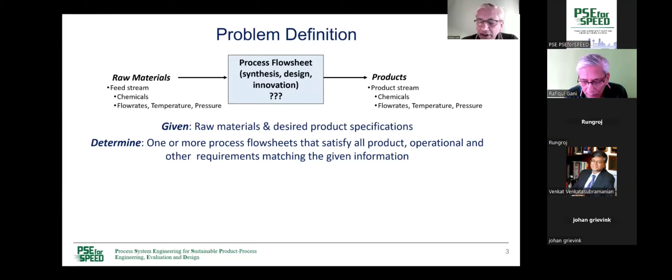As I said, I will start with part 1, where I will introduce the methods for process synthesis design innovation with emphasis on the domain knowledge. The first thing I want to talk about is problem definitions. Here, say that we know the raw materials that we would like to process in order to obtain products with some specifications. Now, in some cases, the chemicals that come in and go out are the same. There will not be any reaction. It will be only a separation process.

Or when the chemicals that come in and go out are not the same, then there would be some reactions or conversions of the raw materials. So this is the basic definition of the problem that we want to solve. We want to know the process flow sheet. We want to know its design. We want to know whether further, better processes could be found. And I will define in more detail what the process synthesis problem is.

The process synthesis problem is that we have some raw materials that we can see on the left, RM1, RM2, and we want to process this to obtain products on the right, which can be P1, P2, P3. And then in the middle, we need some operations that will convert or process the raw materials to the products. And those operations can be different operations that you see on the left: distillation columns, heat exchangers, pumps, reactors, and so on. So the synthesis problem is which are the steps that are needed, and for every step, which operations are needed, as highlighted on the diagram of the network.

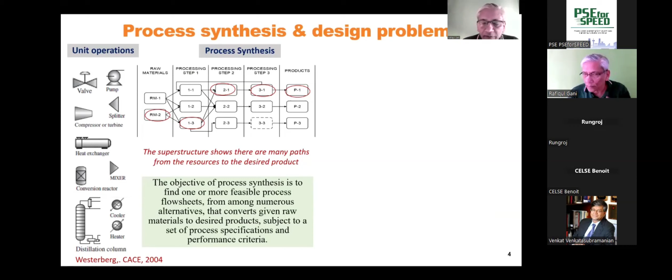Once we have the flow sheet, which is defined by the highlighted boxes, we have a process flow sheet, but we do not have the design of the operations in the process flow sheet. That means in a distillation column, do we have the number of stages, the feed location, etc.? In a reactor, what kind of reactor, the reactor conditions? In the heat exchangers, what kind of heat exchangers, the design of them? All these details need to be filled out.

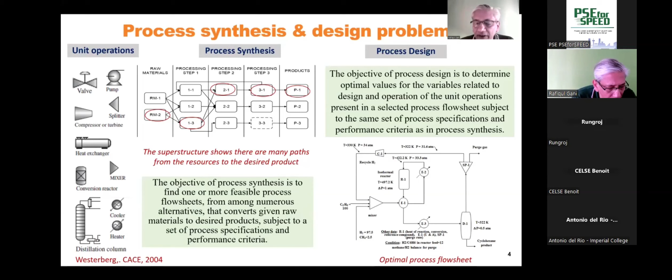Now, the design also needs to be such that we have an optimal process flow sheet with respect to cost, with respect to other constraints like sustainability, safety, and so on. At this point, then we have not only a process flow sheet, but also an optimal process flow sheet satisfying certain constraints. Now, is that enough? I would say it is not enough.

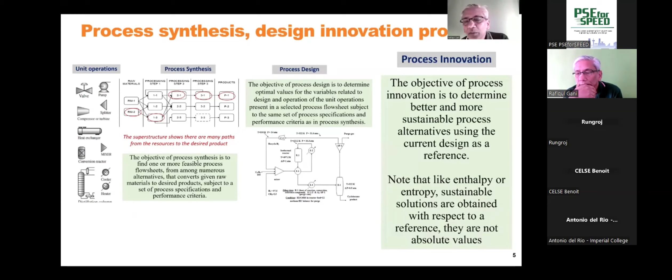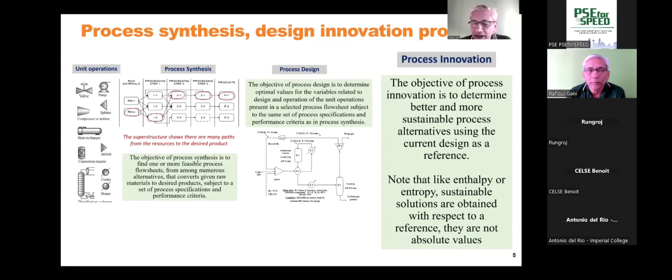We should try to look at more sustainable solutions. And here, by sustainable solutions, we mean that compared to the reference, can we find alternatives that are better in terms of energy, in terms of carbon footprint, in terms of operations, and so on. And if we can find them, then that is the final innovative process flow sheet that we are looking for, and that would be, by definition, more sustainable solutions compared to the reference that we have at the end of the design. So this is the problem we want to solve. Synthesis design innovation, and we will call it sustainable process design.

What are the methods by which we can obtain them? The first one we will talk about is the evolutionary method. This is the method developed by Professor Douglas, and he wrote about it in his book, Conceptual Design of Chemical Processes. It has been used by many people and also in industry. The basic idea of this method is it's a rule-based expert system. Expert asks question, user answers the question.

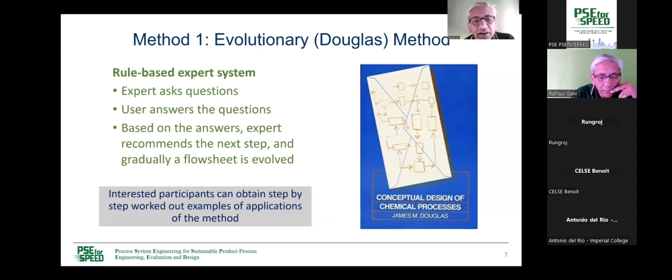Based on the answers, the expert recommends the next step, and gradually a flow sheet is evolved. I'm not going to show too much or discuss too much this method, but any interested participant can contact us, and I can send several detailed worked-out examples.

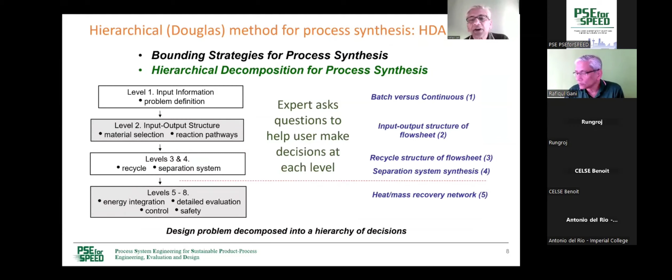Basically, the method is broken down into several levels, and at different levels, different parts of the process synthesis design issues are fixed, like is it a batch or continuous process? Are there recycles? What are the separation systems? And so on.

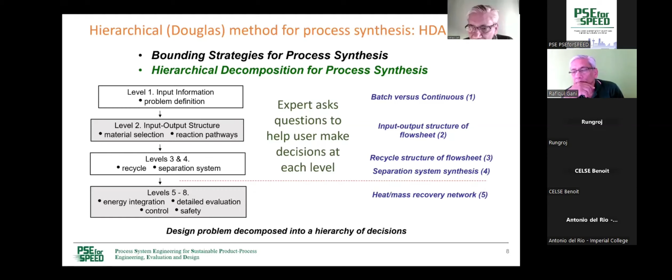In summary, we can say that the method needs a lot of data, a lot of knowledge, and also some computational tools that can be very simple ones, as given in Douglas's book, but we can also use more detailed computational tools that will generate the data that is needed. The method is rule-based and generates a process flow sheet. There is no guarantee on optimality.

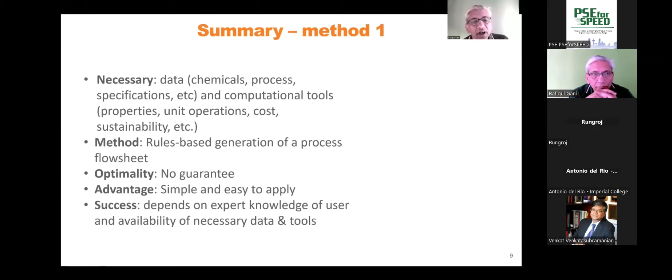The advantage is it's simple and easy to apply, and that's why it has been applied in many places. And the success depends on the expert knowledge of the user and availability of necessary data and tools.

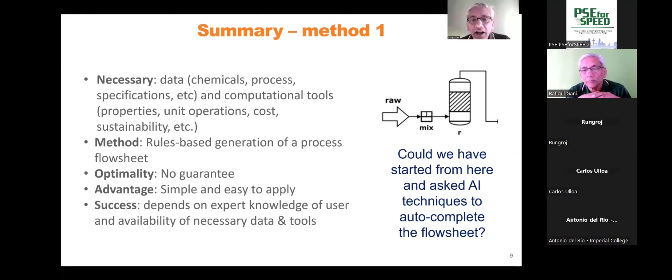At this point, I want to introduce a problem to you. As we can see in the figure on the right, we have some raw material. We do not know what raw material. It comes into the reactor, and a reactor effluent goes out. Can we autocomplete this flow sheet? Just think about it, and I will come back to this later in my lecture. And I go to the next method.

The next method is superstructure-based optimization. So instead of one flow sheet, we want to find all possible flow sheets and also the optimal flow sheet. So here we need a superstructure, and two of the issues in a superstructure are the concept of processing steps or tasks that need to be performed, and the number of intervals or techniques available for each task.

The first issue is what is a processing step and how many processing steps are needed. So if we want to go from the raw materials on the left to the products on the right, how many steps are needed, or how many operations need to be performed to process the raw materials to the products. So that's the first issue.

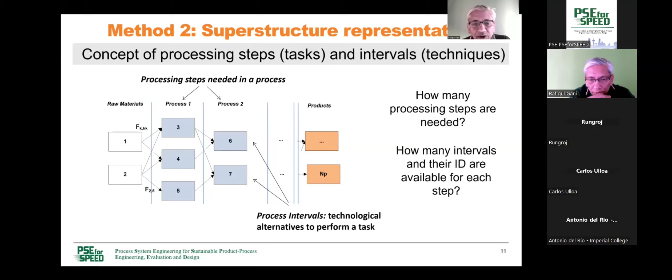The second issue is for each processing step, how many intervals, how many alternatives are there? If we can fill these two questions with all the information, we will end up with a superstructure, as you can see, in a simplified form.

Another important issue is once we have the superstructure, in order to do any calculations, we need models so that we can do not only mass and energy balance, but design calculations, whatever. So what is the model for each of those boxes that you see in red and green and blue? We need models for each of the intervals or techniques. We need to derive them, or we can have them in a library.

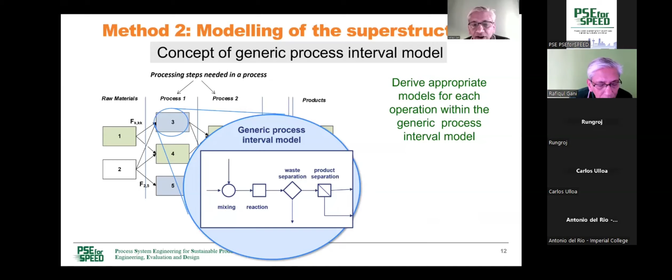We have developed what we call a generic process interval model, where each interval can have operations like mixing, reaction, different kinds of separation. And in the library, we will have in the background different versions of those kinds of models. Now, the interval can have all of these operations, or none of these operations, or a combination of those. So in principle, it could be a network within a network.

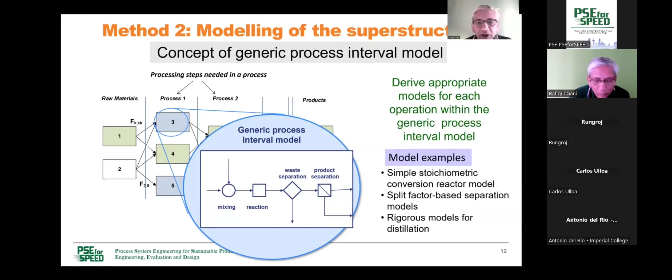But if we have the models of different complexity, we collect all the model equations for each of the intervals, then we will have the full model for the superstructure. Once we have that, we add an objective function that can have different terms: cost, specifications, sustainability criteria, health, safety criteria, and so on.

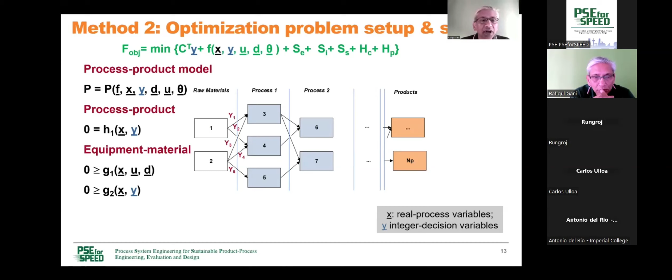And then we have the process model and the specifications on the products. We have constraints on the equipment and material. We have constraints on the combinations between intervals. And this then represents a general problem, which can have different forms depending on the model we use and the problem we want to solve.

So we can have linear programming, nonlinear programming, mixed integer linear programming, MINLP. If we do not have an objective function and only the process model, we can also have just process simulation of different types.

So once we have those model equations to represent the entire superstructure, we need a solver to solve those equations. And the solver will depend on what kind of problem we are solving and the problem complexity. The number of equations can be as little as 6 linear equations or as large as 6 million highly nonlinear equations.

So what we need is also, in addition to the solver, a solution strategy. And all of these can be put into a computer-aided framework where we have a tool which will help to create a superstructure, which will help to retrieve the models from a model library and have the superstructure model, which will then formulate the problem that we want to solve and call the solver. And before calling the solver, we need to provide data, in the form of model parameters as well as input data that can come from a database, and then we use the solution strategy to get the solution.

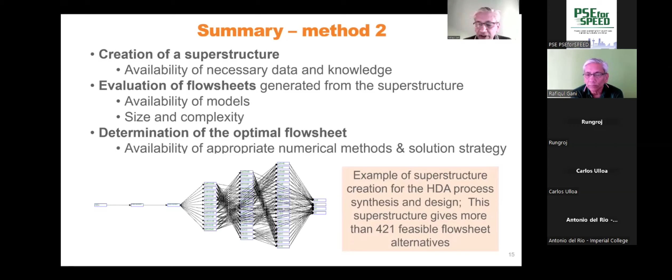What you see in the figure below is the superstructure for the HDA process that we will discuss quite a lot in this presentation. And for this superstructure, there are 421 feasible flowsheet alternatives. Can we evaluate all of them simultaneously? It can be difficult. We prefer to do this in a decomposition manner, that is, break down the problem into smaller subproblems and solve them in a specific order.

This brings me to the final method that we are going to discuss in more detail. This is the domain knowledge-based hybrid AI method for synthesis, design, analysis, innovation, giving us sustainable process design. So let's look at some of the concepts, workflow, and data flow. The method is based on thermodynamics and physical insights, especially for chemical process synthesis or any process synthesis. Then we use extensions of these insights plus some domain knowledge for the process design part. Here we also use reverse engineering, and then additional domain knowledge and more insights help us with process intensification.

I'm going to also revisit representation of the process flowsheet, superstructure flowsheets, sustainable process design with respect to synthesis, design, and analysis issues, and sustainable process design with respect to innovation issues.

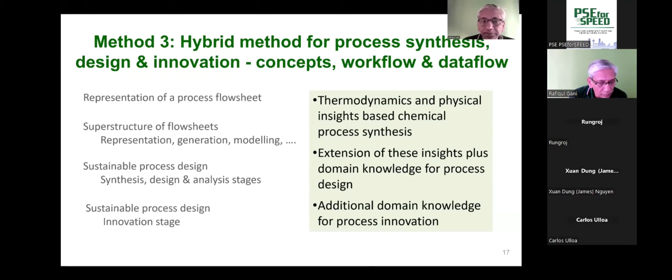So first, some concepts: flowsheet representation with the eSFILES. Here we can see that just like a chemical has a chemical name, for a chemical process, we propose to have a process name. A chemical has a formula with respect to the atoms present. The process will have a formula with respect to the process atoms present. PA here indicates a process atom. The I in front indicates it is an input process atom. R, FL, DL, GM indicate they are operation process atoms. O indicates an output process atom. And the numbers 2 indicate how many there are, just like in a chemical formula.

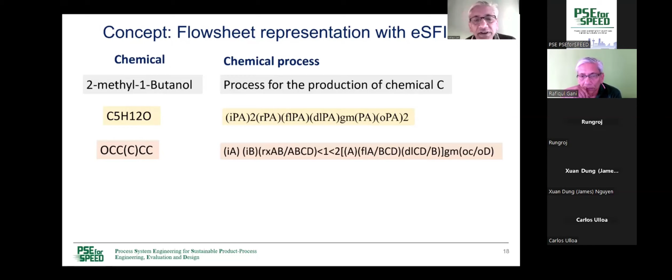And once we know the formula, we can write, in the case of a chemical, the SMILES string. In the case of a chemical process, we can write the eSFILES string. And once we have these, we can also draw the molecular structure in the case of a chemical and draw the chemical process flowsheet structure in the case of a chemical process. Note that this drawing is not just a picture. It has important information in terms of the atoms present in the chemical or the process and the bonds that connect them, and which chemical and which atom are very important here.

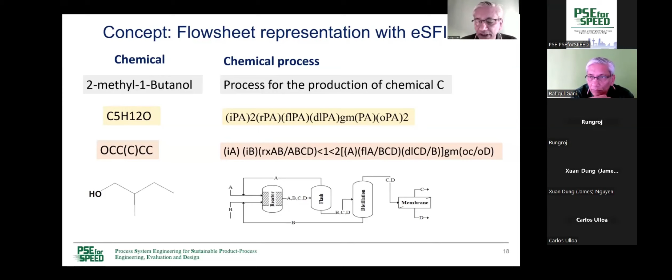So with this background, let me show you how we will use the concept of process atoms. We have a number of process atoms. We have a library of process atoms where you can see different types on the screen. We combine them and get a flowsheet. We have the formula for the process, and we have the eSFILES for the process. I'm not going to discuss more on these now, because in the third lecture, Dr. Vipul Mann will give you all the details of the grammar and the syntax and so on.

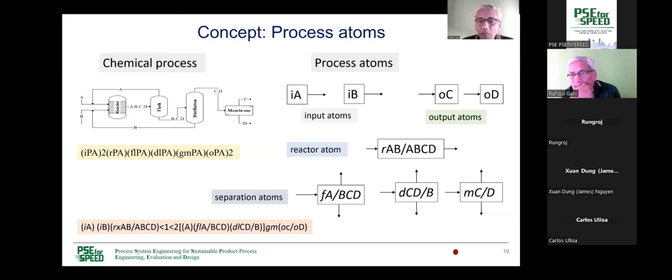But before that, let me also point out that this method is a knowledge-based intelligent system. It does not ask questions like the evolutionary method to make any decisions. It generates the data and guides the user through the workflow steps of different algorithms. It's the user who is in charge. It's not an automated system, but an interactive system.

So the first step, as we talked about before, we need to tell what are the input materials, that is the raw materials coming in, what are the products one would like to have, to process that information about all the input and output in terms of purity of the product, in terms of impurity coming in with the reactants. In this case, we are going to use the HDA process as example to highlight all the different steps.

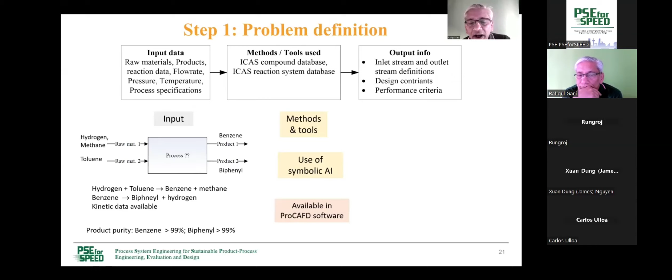In each of these steps, whenever you see the box with available in ProCAFD software, it means our software ProCAFD for sustainable process design has all these steps included in the software. And we use some kind of symbolic AI that Professor Venkatasubramanian will also talk about. So we provide a guideline to the user to define the problem.

And once the user has defined the problem, we will get to know that the process has reaction. The reaction kinetic information is given, and we will know that because the reaction is not 100% converted in terms of raw materials, there will be reactants that need to be recovered and recycled. And the total number of chemicals coming out of the reactor will be also known, and high purity separations will be necessary. These are the information that we will get.

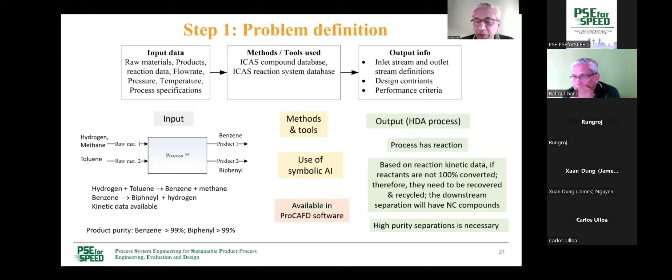Also, the user, in this case, will have to provide the reaction. We are developing a reaction database, but until that time, the user has to give the reaction, and if the atomic balance does not satisfy, the user will have to provide the reaction such that the atomic balance is satisfied. Otherwise, it will not proceed. Once we have step one, we now know all the information.

The next step is knowing this information and generating additional information in terms of retrieving data of the chemicals of the process, retrieving or calculating property calculations of binary mixtures, and many other similar calculations, but not actually process calculations, because we do not know the process at this moment. We know the chemicals, and so we calculate the properties of chemicals, both pure and mixture, and from that, we will try to figure out with our tools what kind of separation or operations can be used to generate the flow sheet.

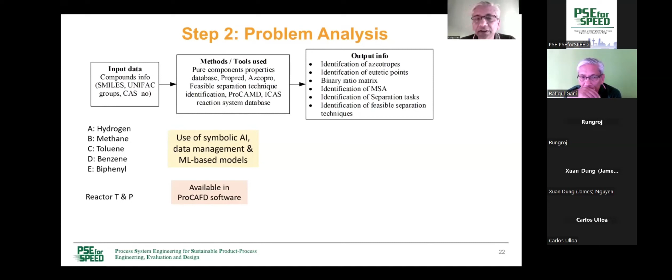And also we know that since hydrogen and methane are coming in together, they will be also going out together. And so even though we have 5 chemicals, we have 4 products. And because we have 4 products, we will have a minimum of 3 separation steps in the process. And because we have 5 chemicals, we have 10 binary pairs of chemicals. Each binary pair could indicate the key compounds in a separation.

And if we know the properties of all these binary pairs, like what are the ratios of boiling point, melting point, vapor pressure at boiling point, and so on, it can indicate to us which type of separation would be feasible. Also, we take into account the driving forces, whether any binary pair forms an azeotrope or eutectic points, and so on. Based on this information, we will be able to find out from our knowledge base a set of feasible separation techniques that could be used after the reaction.

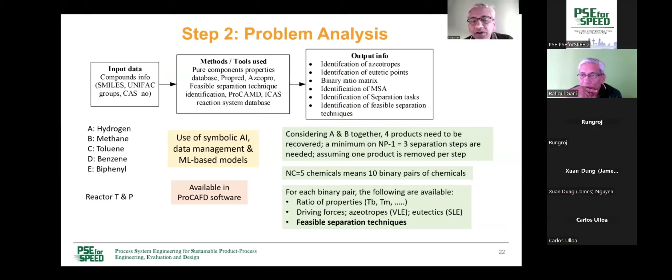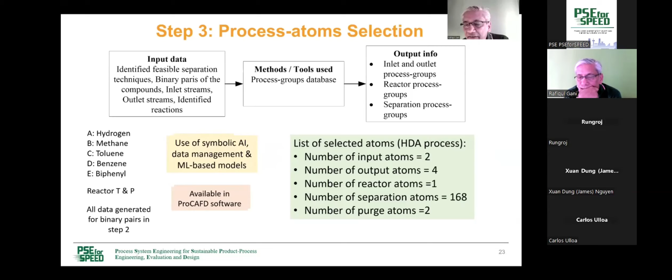So next, we go to step 3. Having all this information that I pointed out in the previous step, we will now have a list of the process atoms. We have 2 input atoms, 4 output atoms, 1 reactor atom. We could have added more reactor atoms if we had more reactor information. We have identified 168 separation atoms and 2 purge atoms because there are 2 recycles.

What are the 168 separation atoms? We have separation techniques for 4-compound separation, 3-compound separation, 2-compound separation, and for each of them, distillation could be one, membrane could be one, absorption could be one, crystallization could be one. So all those separation techniques are taken together and we have 168 separation atoms.

What is the next step? Next step is to generate the flow sheet. Having all this information, the problem is now, how many ways can we assign the process atoms that we have to the 3 downstream separation steps after the reactor atom?

Note that the input atoms are at the start, the output atoms are at the end. So how many ways can we combine? And we have put in rules so that some redundant combinations are not used. So for example, if we have already decided a 4-compound separation, in the downstream part, we do not need to consider those 4-compound separations anymore.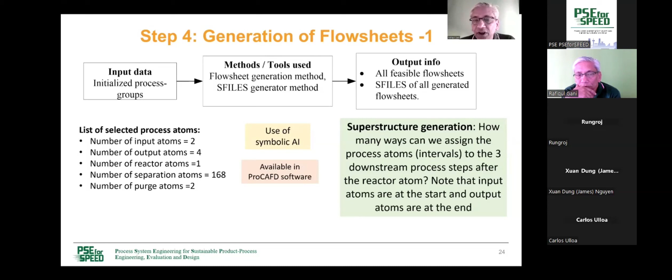So like that, even though there are 168 separation atoms that can, in principle, give us many flow sheet alternatives, it's not a combinatorial explosion. And here are 2 examples.

If we do not restrict the separation techniques that we can generate, now we will have a superstructure with 421 flow sheet alternatives. These are feasible theoretically, but we cannot calculate for all of them because for some of them, we know that we do not have the model parameters. For example, we may have several membrane-based separation atoms, but for some of them, the permeability data that would be needed are not there, or the adsorption isotherms are not available.

So if we remove them, and if we also see that the HDA example process is a hydrocarbon separation where there are no azeotropes and no close boiling mixtures, basically a combination of flash and distillation are feasible there. So if we take only the flash and distillation, you see the superstructure below, which has 10 feasible alternatives, even though many more can be generated.

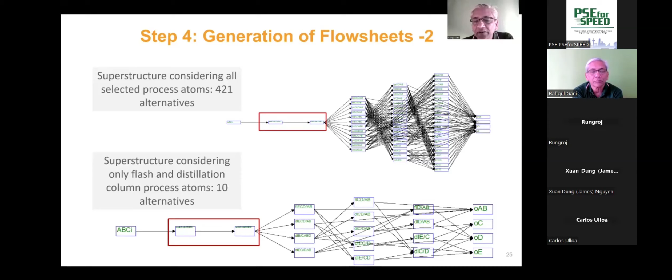So now let me give you a little bit more concept with respect to extension of the eSFILES for superstructure. So let us say that we have a mixture ABCD that may be extracted from some seed or from the ground, or is a reactor effluent. We need to separate these 4 compounds into 4 pure compounds. And let us say for illustrative purposes that for these 4 compounds, no binary pair forms azeotropes, and they can be separated very efficiently by distillation.

So we have a 4-compound separation, and we need minimum 3 steps. In the first step, we will make a 4-compound separation, and by distillation, only these 3 will be feasible. And the integer variables we have introduced now are binary integer variables. If it is 1, that is the path that will be taken. If it is 0, then it's not the path that will be taken. And the summation of these 3 binary variables will be 1.

So in that case, going from the 4-compound to the 3-compound separation, or after the first separation step, we will only use one of these 3 alternatives. Note that the second alternative breaks the 4 compounds into 2 binary pairs. And the other ones reduce the 4-compound separation into 1 product and a 3-compound separation.

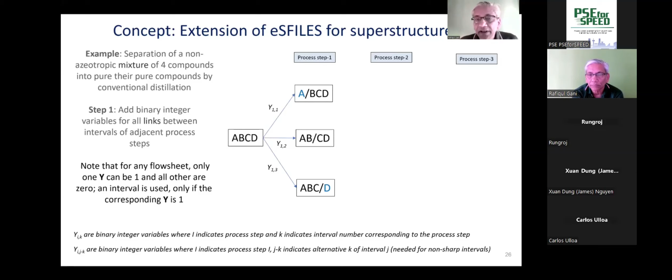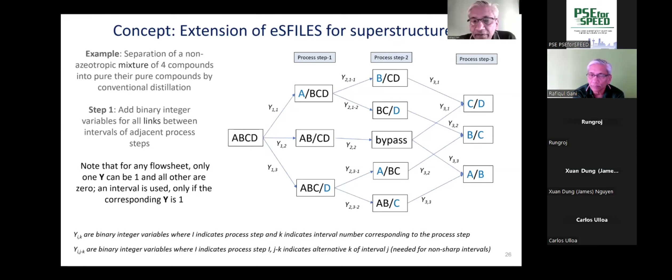So in the next step, we have 3-compound separations. The middle one is bypassed because the separations involve 2 compounds. So we have these alternatives, and then the last one has 2-compound separations. That is the superstructure, and in each case, the binary variable summation is 1, so we will only use one of them. So that's the first part of representing the superstructure in order to derive the eSFILES for the superstructure.

Next step, we collect all this information and we put them into a SMILES string, just like the eSFILES string. So we have the input A, B, C, D. That's the input atom. Then Y1 indicates, if it is 1, that the process atom will be used. And the subscript K indicates one of the 3 that is available in step 1. Then in step 2, we have a J because there are 2 alternatives for some of the intervals. And then the K is which interval.

So by adding the values of J and K for each of those intervals, we can generate from this eSFILES of the superstructure all the different flow sheets that are needed. But before I go there, let me also show the hypergraph for the superstructure. And again, with the integer variables and the values of J and K, we can generate any flow sheet from this superstructure.

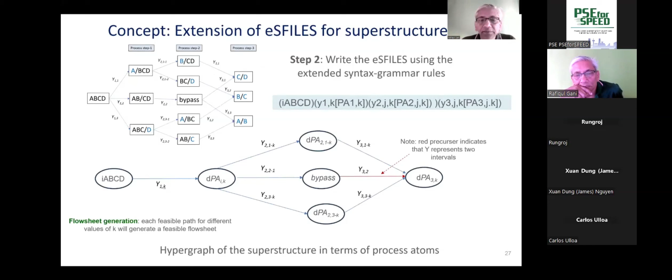So now let's see: we have the hypergraph, we have the eSFILES for the superstructure by giving values of J and K for every processing step, and then having a table with all the groups corresponding to J and K, we can then generate the eSFILES for any process flowsheet alternative.

And this would be level 0, where it will be the flow diagram indicating how many chemicals are there, what kind of operations, and then more information about which chemicals, which operations, additional information in terms of which type of operations, what is the model for that, in the simple case like simple mass and energy balance, or more rigorous models.

In each case, especially in levels 1, 2, and 3, there's input information, there is output information, and as we go higher in level, the amount of information increases. But it's both input and output information that is kept. And you will get more information about this also in the 3rd lecture by Dr. Vipul Mann.

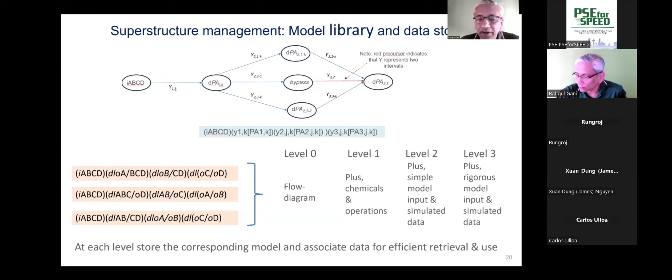So if we go back to the HDA case, we have the superstructure, the simple superstructure, the 2 recycle candidates are highlighted. You can see the eSFILES of the superstructure, and 10 flowsheet alternatives are generated.

Now the next question is, we have generated the flowsheet. How are we going to do the design? Should we design all of them and optimize all of them, or should we remove some redundant ones? For that, we need to evaluate these flowsheets. But we do not have the design, so we cannot do detailed simulation at this point.

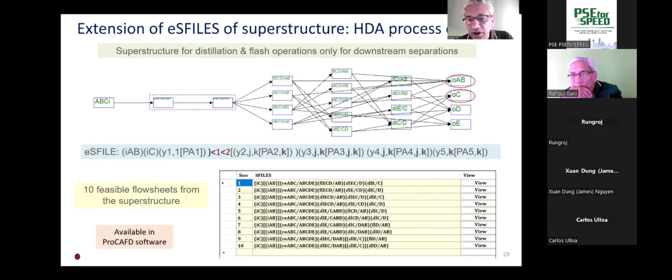So what we have therefore developed is just like a chemical, we can use the structural information to calculate the property of a chemical. Here, we are going to use the structural information to calculate the properties of a flowsheet. And these properties of flowsheet could be energy consumption, carbon footprint, product recovery, product purity, environmental impact, and so on.

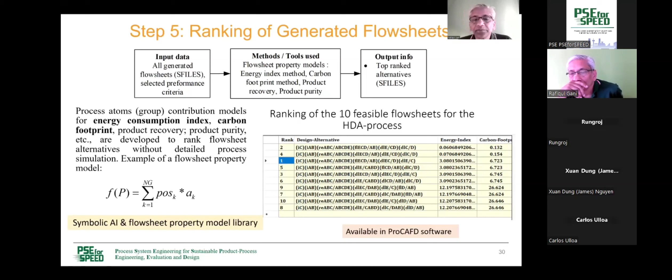For the HDA example, if we take the energy index, we see that there are 2 which are very good with respect to energy index. The lower, the better. And the last 4 are not very good. So we can focus on the first 2 or the first 6 if we want, and ignore the last 4. So for these, let's say, the small number which are promising, we will do the detailed design.

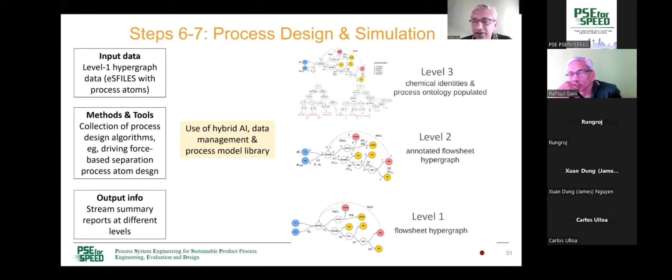And then for each of those flowsheets, as I mentioned before, we have the level 1 information. We will add the level 2 information with the simple models. We will add the level 3 information with the more detailed models, and more information about this will be given by Dr. Vipul Mann in lecture 3. So I will skip more information. But note that from level 1, level 2, level 3, we can connect to different calculators, simulators, to do the simulations and pass the values to us.

HDA process was a simple process in terms of separations, because there were no azeotropes, there was no gas absorption required, and so the flowsheet was simpler and did not require some complex decisions. But in many chemical processes, we do have azeotropes, gas separation. So we have introduced the concept of process groups, which is a combination of atoms, and there is an internal recycle within them. So like a solvent-based extraction that you can see, pressure swing distillation. All of them have a recycle, but which is within the process group.

As far as the process atoms are concerned, we have 2 process atoms. It can be 2 or more process atoms that define a group, but we are defining these groups in such a way that the recycle is within it. And it has the same concept like a ring compound, an aromatic ring or a naphthenic ring compound would be similar to this kind of process groups.

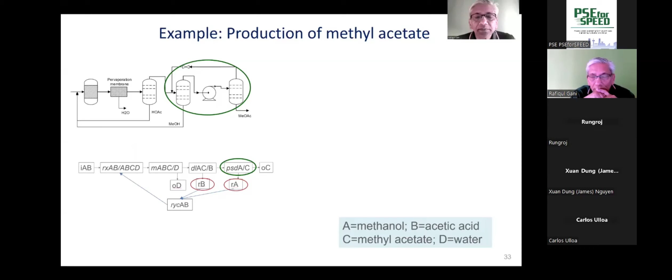And how can we use these process groups? If we take the methyl acetate process, where there is a reactor followed by membrane separation, distillation and a pressure swing distillation, we represent the 2 columns in the pressure swing distillation by a process group. And here is the superstructure, SFILES for it, and different alternatives we can generate. If you look at the green part, pressure swing distillation is possible, solvent-based extraction is possible, and for different solvents, there will be different process groups.

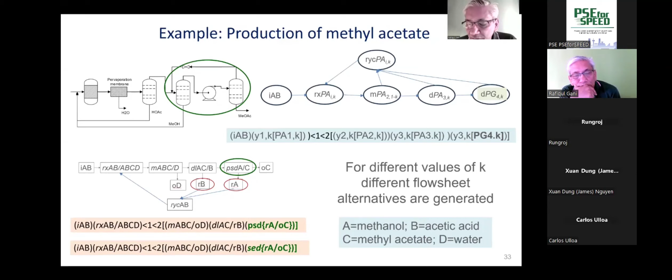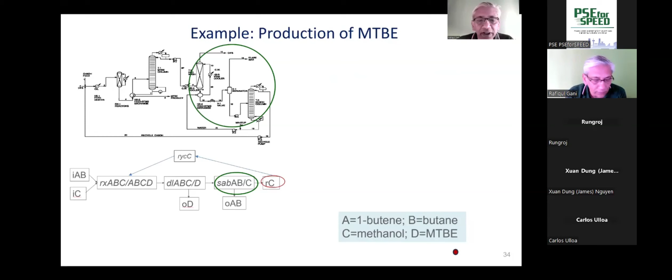So we can generate a large number of alternatives, but note that the process group recycle is not affecting the other parts of the process flowsheet. So it's actually simpler to use and more efficient to do calculations. Another example, the MTBE, where there is absorption followed by solvent recovery. And in the same way, we can generate all the information we need. And again, it's a much better way of representing more complex flowsheets.

In the presentation by Dr. Vipul Mann, he will also show an example where we have 2 reactors in the process followed by separations.

So there will be a process group representing one part of the process, and another part is just the process atoms. So things like that also can be done.

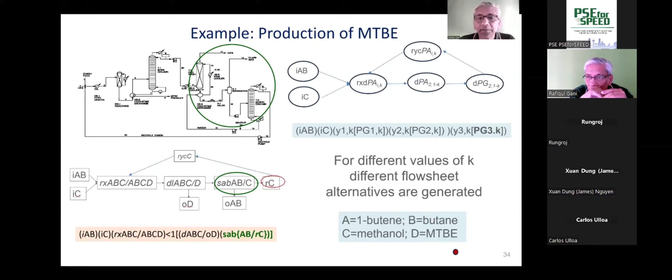So at the end of step 7, we have a flow sheet, one or more very promising flow sheets, and we can evaluate them. So here now we will do the analysis of cost, sustainability, LCA, safety, and many more. And by doing that, we will identify opportunities for improvement. This can be, for example, integration of hot and cold streams with respect to heat exchange. We could have done that already before. We can also do it here.

We can also find out information like one of the distillation columns is using a lot of the energy, there is some unacceptable release of compounds in a purge stream, like benzene going out in the purge stream, high pressure flow of gases, and so on. Then once we have identified them, we can set the targets for improvement, and then by optimization, by adding more information, we can find alternatives that are better than the reference. And then by definition, any that matches those are more sustainable than the reference.

So at the end of step 9, we will have the targets and the analysis and the reference process. And in 10 to 12, we will do the innovation. And as I said, based on the targets, we will try to find a flow sheet that is better. In the case of the HDA, we do the heat integration and optimization, and we find a more sustainable design.

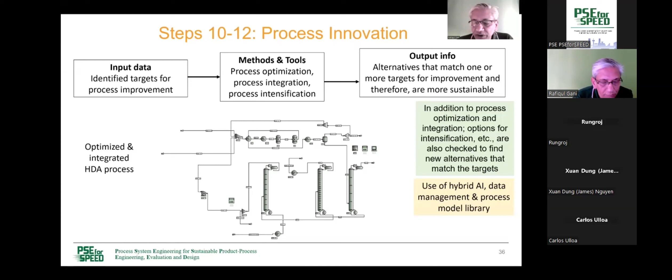In addition to optimization and integration, we could have also done intensification or other hybrid schemes. And would they be feasible or not? Should we use a trial and error way to check whether we can use reactive distillation or dividing wall column or hybrid distillation membrane to improve this process? In order to do this, we have developed a rule-based method where we ask 7 questions in each case.

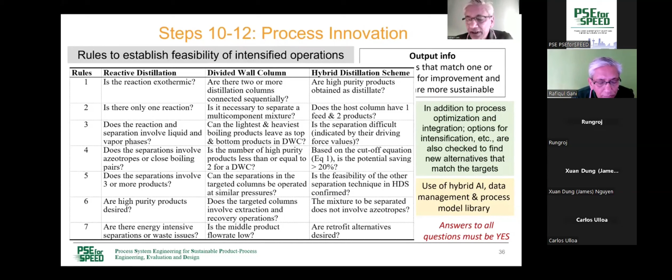If the answers to each of them is yes, then there would be a part of reaction followed by separation that could be replaced by reactive distillation, or 2 adjacent distillation columns replaced by a dividing wall column, or a membrane could be added to the distillation like a retrofit to improve the energy. So all of this can be done, but we do not do trial and error. If the answers to all the 7 questions is yes, then definitely they will be feasible.

So here are some examples. We have the methyl acetate process that can be converted to a reactive distillation, the dioxolane process that can be converted to reactive distillation as well as dividing wall column, and a separation process of hydrocarbons coming from a petrochemical complex that can be converted to dividing wall column and hybrid separation.

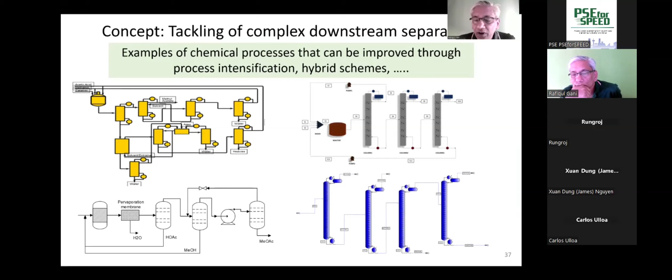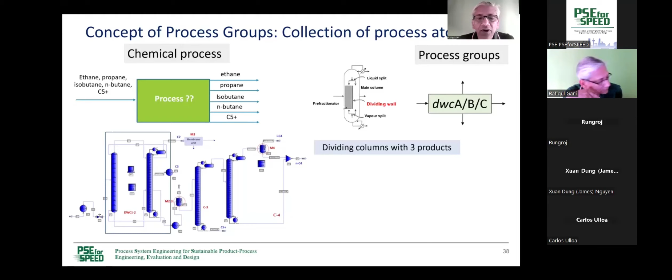So here is the example of the hydrocarbon separation. This is coming from an actual industrial problem. The first 2 columns are converted into a dividing wall column. In the last column a membrane is added, and this alternative gives nearly 40% improvement on the original. And we have now the corresponding process groups also, and a corresponding model for them.

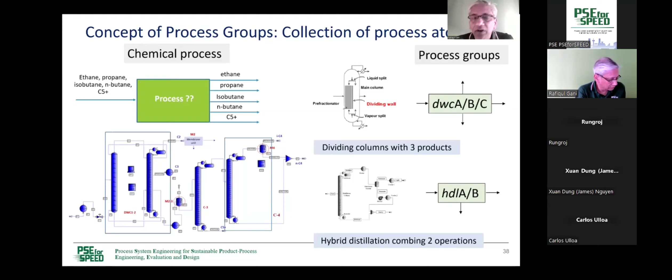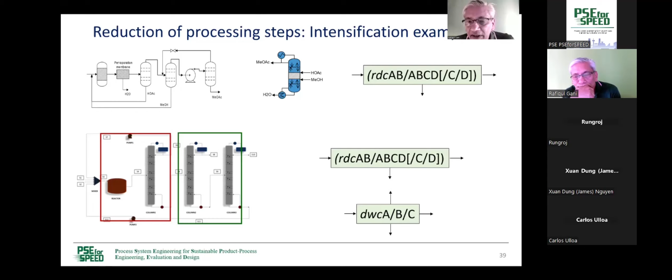Similarly, for the methyl acetate example, the flow sheet is converted to a reactive distillation with an improvement of at least 20%. In the dioxolane process, we have the reactor plus the distillation column replaced by a reactive distillation column, the distillation columns replaced by a dividing wall column, and they're combined together to form a reactive dividing wall column.

And I come back to the question of, we have some raw material coming into the reactor. The effluent is coming out of the reactor going into an absorber. Can we autocomplete this flow sheet? Does it make any sense to do it? And what I would say is that it doesn't make any sense to do auto-completion without a context. We need to know what is the reaction.

We need to know how many compounds are coming out, so we can find out which of the generated flow sheets would be feasible or not. So auto-completion without context would be just generating all kinds of flow sheets. Some of them would be feasible, others will not be. By putting a constraint or a context, we screen the generated flow sheets to find out which are feasible.

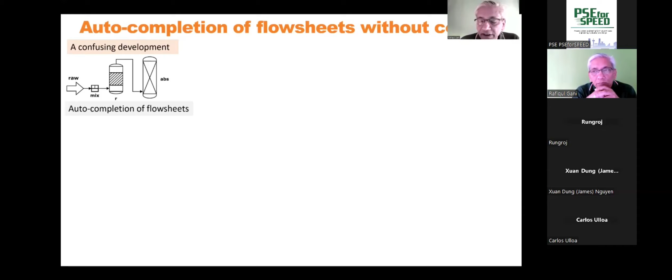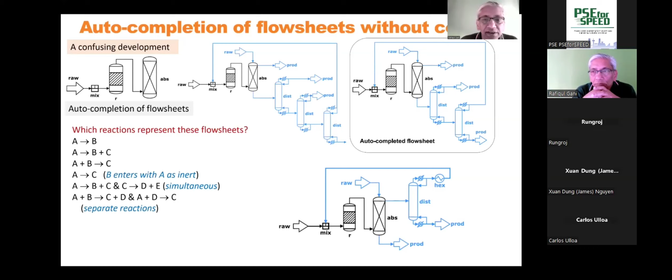This will be discussed in more detail by Professor Venkatasubramanian in his second lecture, but we'll just show the same flow sheets and raise the same questions. Are each of them correct? It could be all of them are wrong. It could be one of them is correct because of the reactions that will take place.

Summary of this method is we have an intelligent, flexible, consistent process synthesis design innovation method. We use hybrid AI with machine learning and domain knowledge wherever necessary, allow systematic solution of related problems by efficient management of the complexity. We use computers to speed up. We use domain knowledge to define the problem at every step.

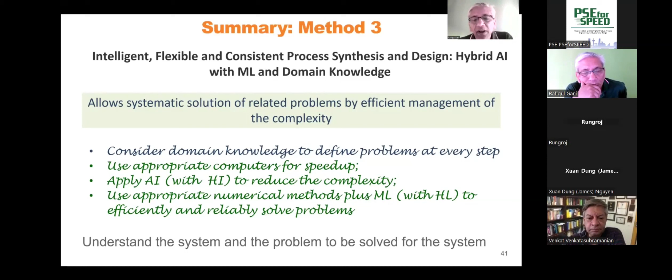We use AI together with HI, which is, for me, human intelligence, because we have to select the AI, we have to apply the AI, we have to train the AI, so human intelligence should not be forgotten. To reduce the complexity, we use appropriate numerical methods plus ML with HL, that is human learning. We are the ones who need to apply the machine learning. We are the ones who need to train the machine learning. So we also need some human learning there to efficiently and reliably solve the problem. It is important to understand the system and the problem to be solved for the system.

Finally, some perspectives. Even though much progress has been made, there are still many issues that need to be addressed to establish the scope and significance of the method that I have shown you. And additional development means widening the scope and significance. So we can solve many problems, but we want to widen the scope and significance. Some extensions, like how to include the vast and available domain knowledge into the algorithms, methods with associated tools, how to transfer the relevant data from one application or problem to another, how to improve and add new models of different layers. So a modeling tool is very important, and we are developing those modeling tools.

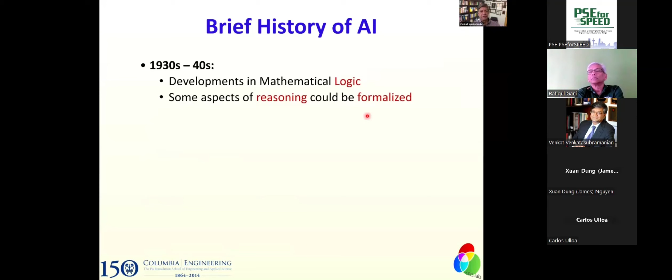So brief history of AI. The origins go back to the 30s and 40s when mathematicians, particularly logicians, started playing around with the idea that some aspects of reasoning could be formalized, which means they can be automated. And then they built upon this idea in the 40s and 50s, and Turing came along and proposed his Turing machine in the 50s, and also the famous Turing test. And so all these things are ideas about the link between the formalization of reasoning and computation, and that abstract concept of computation as symbol processing, which can be automated, hence computers.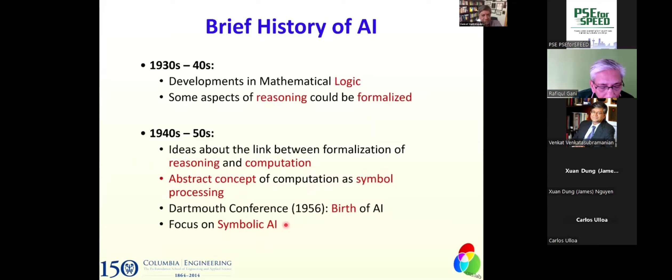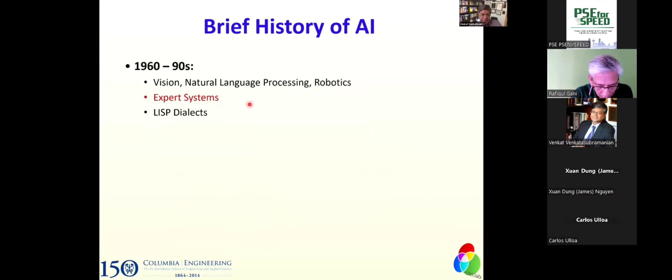AI was born at this conference in mathematics at Dartmouth in 1956, and the name artificial intelligence was given at the time. And the initial focus was on symbolic AI because it all came out of symbolic logic. And in the 60s through 90s, AI people tried to get computers to do vision, natural language processing, robotics. Expert systems arrived at the time, various AI languages called Lisp and its dialects arrived.

And from 1990 onwards, the field shifted towards machine learning, particularly neural networks-based learning, with the rediscovery of the backpropagation algorithm in 1986 by Geoffrey Hinton and company. And so the focus shifted to data-driven AI, and ideas like autoencoder, deep neural nets were proposed in the 90s, reinforcement learning, etc. And then the most recent exciting innovation is transformers, which is behind all the large language models.

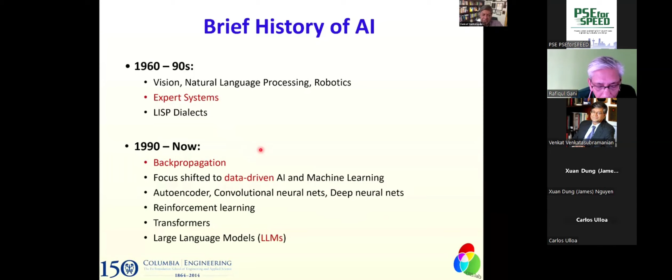Okay, so in phase one, which is what I call the expert systems era, here the idea was to develop computer systems that mimicked human expert reasoning. And the key ideas were structuring these systems in this form: a knowledge base, inference engine and the user interface. And the knowledge base contained domain-specific knowledge, which was represented in the form of if-then rules and semantic networks. And this separation of domain knowledge from inference was a key idea, which gave rise to flexible execution order of the program. So this all happened in the late 70s and early 80s in computer science.

And then immediately these were adopted by chemical engineers in the early 80s. The earliest expert system was developed at Carnegie Mellon by Art Westerberg and his graduate student, Rene Banares-Alcantara, a good friend of mine who is now a professor of chemical engineering at Oxford. So Rene did this work for his master's thesis and for his PhD. And others also started looking into AI-based approaches.

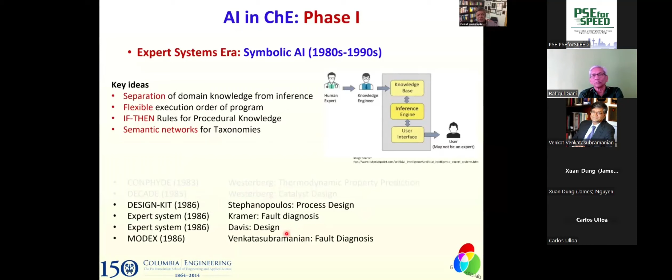George Stephanopoulos at MIT started his AI work around that time with this focus on design, process design. And Mark Kramer again at MIT on fault diagnosis, Jim Davis at Ohio State at that time on design, and myself at Columbia on fault diagnosis. So that was phase one.

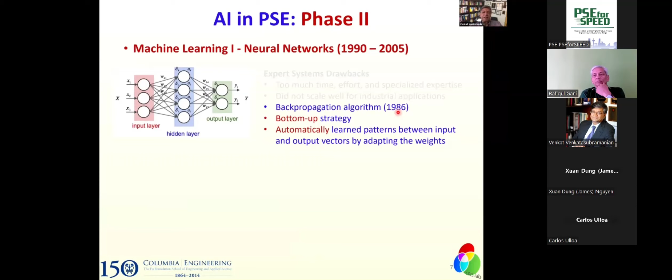Then in phase two, as I mentioned, neural networks was the focus. And that's because expert system development had certain drawbacks. They required too much time, effort, and specialized expertise. And so as a result, they did not scale well for industrial applications. And so people were looking at other paradigms, and neural networks arrived, particularly with the rediscovery of the backpropagation algorithm, where you simply had to show the data to the neural network and it automatically learned the association between these patterns by adjusting the weights. So that's where the backprop comes in. And it's a bottom-up strategy, where the system automatically learned the patterns, which made system development a lot easier.

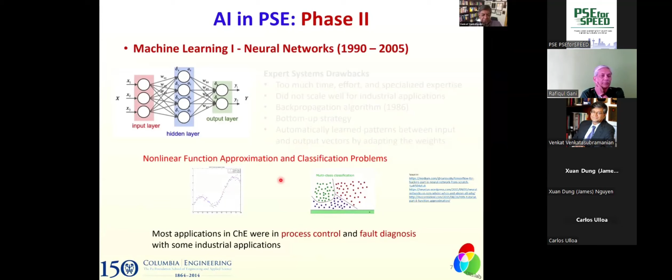So immediately people started applying these things for nonlinear function approximation problems as well as classification problems. And in chemical engineering, lots of applications in process control, fault diagnosis, and property prediction, and so on. And then we entered phase three, which I call the data science era. And that started roughly 15 to 20 years ago, but really picked up speed in the last 10 years.

And the key ideas here are the convolutional or the deep neural networks, as shown here on the right-hand side for a vision problem, reinforcement learning, and statistical machine learning. And what these techniques enabled was to be able to do hierarchical feature extraction, as you can see here, which is what is needed for complex visual perception.

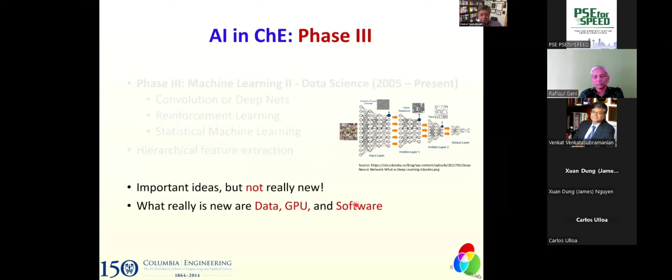These ideas were important, but not all that new. As I mentioned, many of these algorithms and ideas were proposed in the 90s. We simply couldn't use them that much because we didn't have the computing power or the data. So what is really new now are data, GPU, and software, more or less in that order of importance. And this is why now we have Watson, Siri, Alexa, AlphaGo, LLMs, and so on.

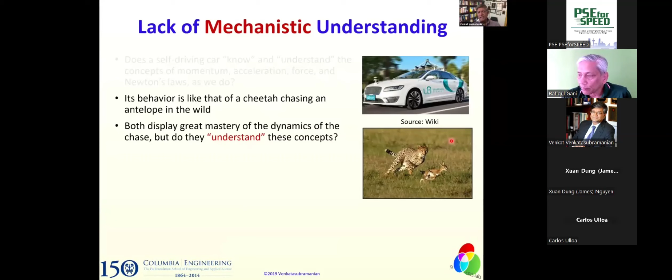But both are clueless about the underlying physics, which is classical mechanics, or the underlying math, which is calculus. So these animals have mastered their task in an operational way. They have an operational understanding. They know what to do, how to jump, how to run, how to chase, how to bob and weave, but they don't understand the deep principles.

My claim is that current AI systems have achieved perhaps an animal-like mastery of their task without gaining a deep understanding as we do. Now, as a scientist, this is deeply troubling to me. And that's why in my lab, we've been working for the last 40 years in developing hybrid AI systems which are grounded in first principles, where we try to put in as much of the underlying physics, chemistry, and biology as possible, and not be purely a black box oriented data science kind of a model.

So we develop first principles based models because I think that is the way to go in the long run, even though in the short run, machine learning data science has its uses. So it's also concerning to me as an engineer because mechanistic causal understanding is important in certain applications like diagnosis, control, and safety. For example, when Yelp makes a recommendation and you go to a restaurant with your date and you don't like the food, then you lost perhaps a couple of hours and a couple of $100, and maybe your date is mad at you, but hopefully nobody died.

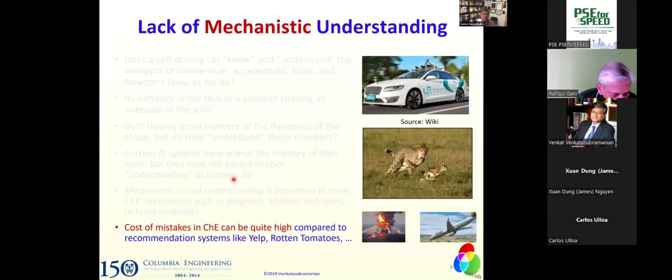Whereas in our domain, when things go wrong, the cost of a mistake can be potentially very high. When our chemical plants explode, people die. When planes crash, people die. So the cost of a mistake in movie recommendations and restaurant recommendations is low, whereas in certain domains such as chemical engineering, nuclear engineering, pharmaceutical engineering, aerospace engineering, mining engineering, and so on, the cost of a mistake could be potentially high. So we cannot simply trust black box models. We have to build first principles based hybrid AI models.

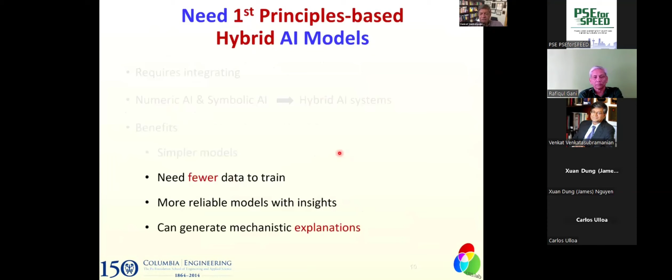So this brings us to the topic of hybrid AI, which is combining numeric AI, which is machine learning, with symbolic AI of the 60s, 70s, and 80s. And the benefits are the models are simpler because they are grounded in first principles. You need much less data to train them, and they are more reliable, and they offer you insights and explanations. So I'm going to give you 3 different applications as examples of how hybrid AI models can be developed and what they look like.

The first one is the flow sheet synthesis, which is what our presentation today is about. Professor Gani talked about it, and Dr. Vipul Mann is going to talk about it much more in the next presentation. So I won't spend much time on this. But I'll give you a quick flavor of how hybrid AI would look in the context of flow sheet synthesis. But I'll spend more time on 2 other applications, which is mechanistic model discovery from data and reaction prediction, and how hybrid AI systems look in these applications.

So now hybrid AI is going to look different in different applications. That is the idea. That's the message I'm going to leave you with and give you a sense of how these things can look different in different applications.

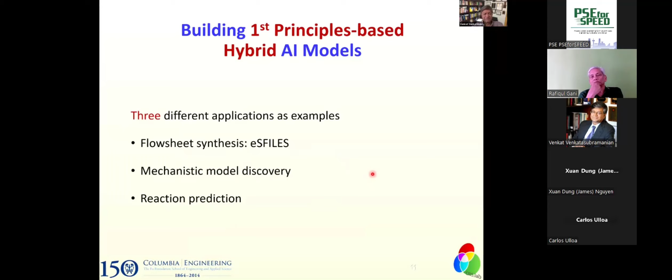Now, in natural language, of course, this idea has been enormously successful. This is how ChatGPT, for example, converses with you. Based on what you have said, it guesses the next word. For example, if I were to say, I'm going to be home for, it's a reasonable guess to say dinner or party or this weekend or summer and so on. So these are reasonable guesses. And even if you guessed wrong, you can still carry on the conversation by correcting yourself in the subsequent sentences.

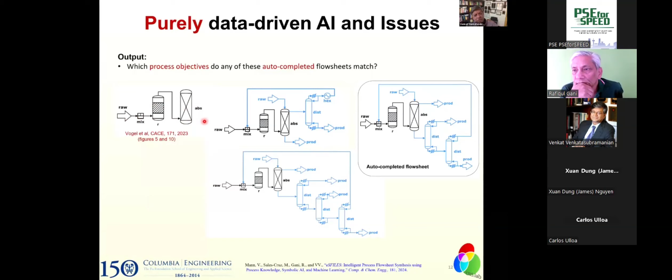So without the contextual information here, just giving these 3 process equipment and saying, go complete the rest, it makes no sense because I can generate hundreds, sometimes even thousands of possibilities. And most of them are going to be useless without knowing the process context. For example, what is the reaction? Is it A going to B, or A going to B plus C, or A plus B going to C, and so on? Depending on these things, there are different ways this thing can be completed. So there is a mismatch of process knowledge and flow sheet.

And the way to do this is not using purely data-driven AI, but you have to use the domain knowledge. That is the context and the underlying chemistry and physics related constraints and so on. And this is what we call hybrid AI. And the domain knowledge is built in the form of an ontology, which I'll talk about in the next few slides. And then you combine it with machine learning techniques.

So what is an ontology? Basically, ontology is the study of existence, as philosophers told us, but computer scientists have a more practical view of this term. Ontology is the formal specification of concepts and relationships, basically because how do you represent knowledge in a computer? How do you formally structure it? And that is what ontology is about. And it has had a long history in its evolution.

As I mentioned, in the 30s and 40s, knowledge representation started with ideas from symbolic logic. Then in the 60s, semantic networks came along. Then in the 70s, frames came along. And in the 80s, objects. And the most recent avatar of this long series of evolution is ontology. Now, web-driven software development also contributed to this development with object-oriented programming and so on. And the nice thing about this ontological framework is it's grounded in first-order logic. So it's got some serious mathematical foundation, which is the foundation for formal reasoning here.